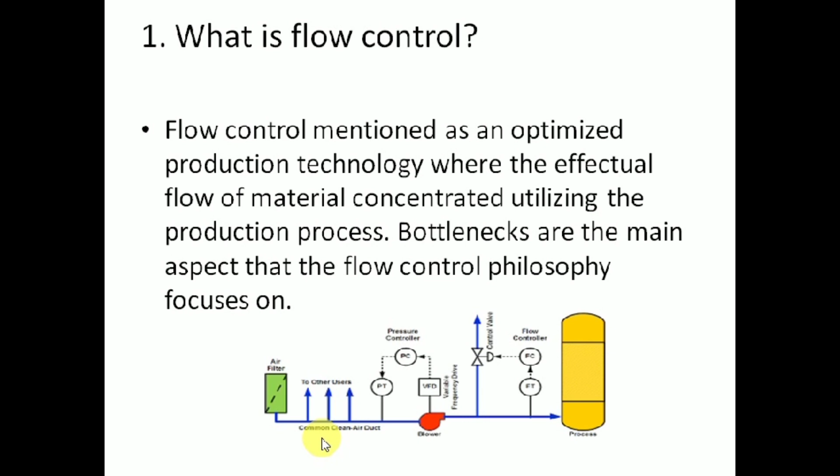So second question, mention the difference between unit operation and unit process. I briefly described the difference between unit operation and unit process in the last lecture, lecture number 2. I also share the link in the description so you can understand from that video. But I describe it in a simple way.

Unit processes are chemical transformations or conversions. Basically a unit process is called a chemical conversion that is performed in a process. For example, dehydrogenation, smelting, reduction, electrolysis. Electrolysis is a process which can produce hydrogen, so you call it electrolysis of water. What is a unit operation?

Unit operations are physical treatment steps in a chemical process which are required to put raw material in a form in which it can be reacted chemically, and to put the product in a form which is suitable for the market. Basically, unit operations are called physical operations.

So basically, in unit operations changes take place in mass and concentration where energy is provided from an external source without any chemical change. For example, mixing, evaporation. Evaporation basically enhances the concentration of solute. So these are the deep concepts of unit process and unit operation. This is a very important question for industrial interviews.

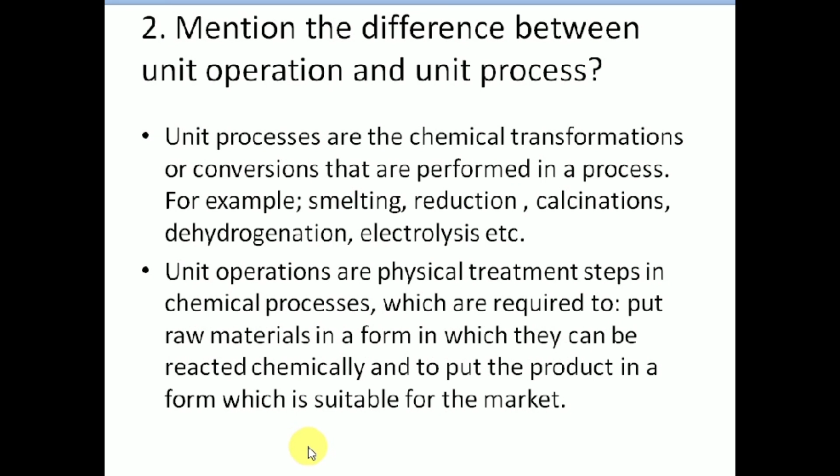So the third question is a very important question. What is a solvent? A solvent can be defined as a liquid that can suspend, dissolve or take out other chemicals, where they do not perform any chemical change to the material or solvent. The main process of a solvent is to clean, apply, process or separate materials.

So what is the purpose of the solvent? To extract the required solute. Feed consists of solute and carrier liquid. What is the purpose of the extraction process? To separate solute from feed with the help of solvent. Solvent does not chemically react with the feed, but it is useful to separate solute from feed. The actual product is the extract.

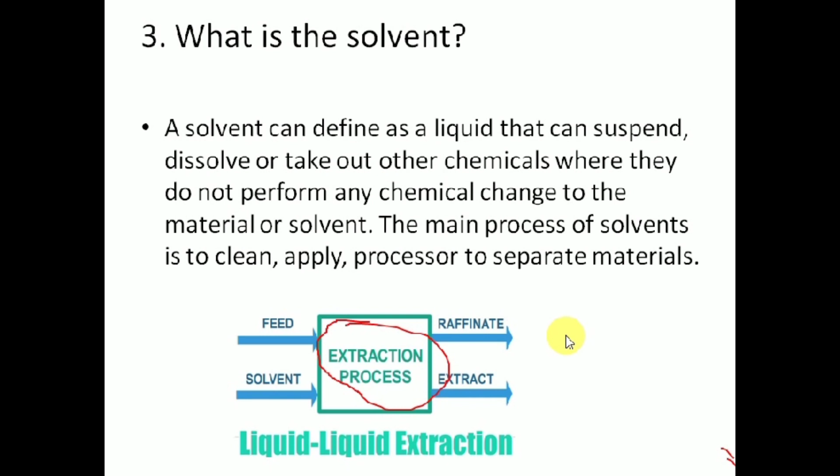The fourth question is very important. What is material requirement planning? When the number of finished goods is provided, it requires an appropriate quantity of raw materials and related components to make them. A computerized tool that is used to handle material orders to supply at a later date is called a material requirement planning system.

So basically, what is the purpose of material requirement planning? A computerized tool that is used to handle material orders to supply at a later date is called a material requirement planning system.

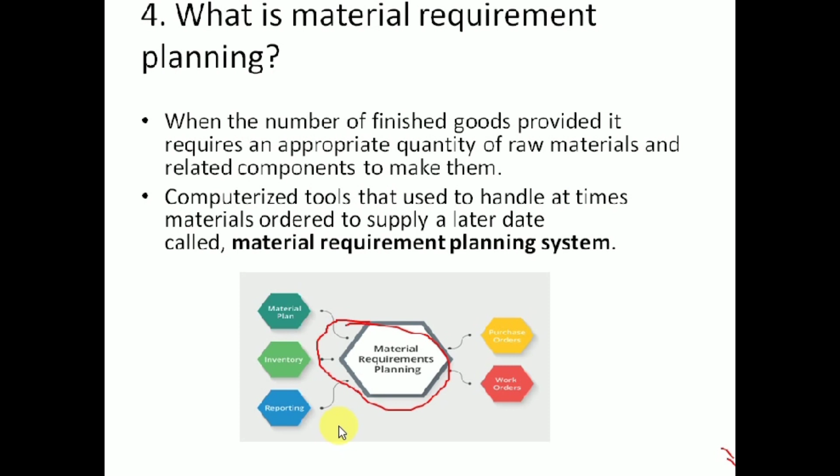Question 5 is very important. What are PCBs? The abbreviation for PCBs is polychlorinated biphenyls, and it is mainly utilized for disposal issues, usually in the chemical industry.

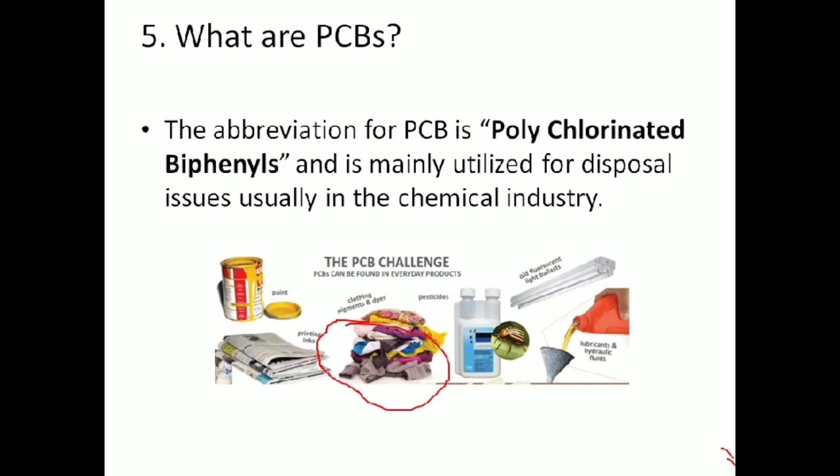So sixth question: what are the design considerations for a piping system to transfer slurries? The point to consider when designing a pipe to transfer slurries is that the pipe should have the capability to self-drain. In the case where self-drain is not possible, manual draining facility should be installed. Also, when plugging opportunities are high, blowout or rodout connections must be provided to clear the lines.

Clean out connections must be installed on both sides of the valves for proper flushing. Access flanges must make use of T connections. Flange connections must be provided to all manifolds for easy usage.

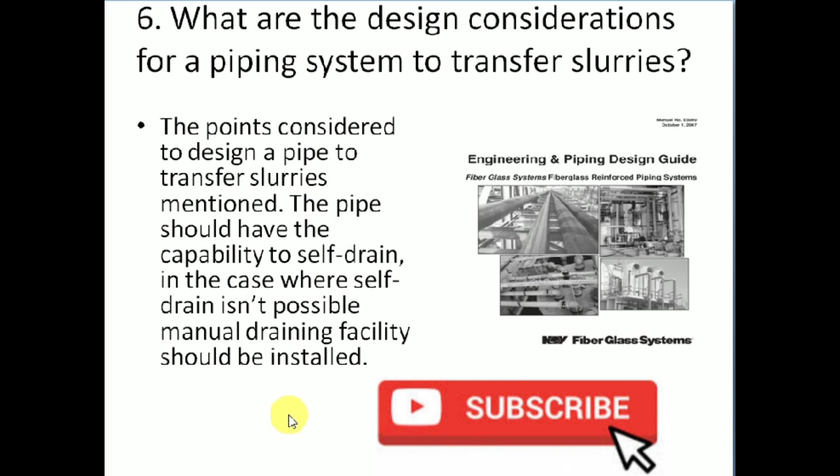When the interviewer asks about the third law of thermodynamics: according to this law, we can make the entropy of any system zero, but that system should be a crystalline solid and the temperature should be absolute zero, meaning minus 273 degrees Celsius. At absolute zero, the entropy of any system will be zero.

According to the third law of thermodynamics, when a system reaches absolute zero, a minimum value is reached by the entropy of the system. For the universe to attain absolute zero is very difficult; it is not possible to freeze the molecules of any substance, even a perfect crystalline solid. A perfect crystalline solid at absolute zero will have zero entropy.

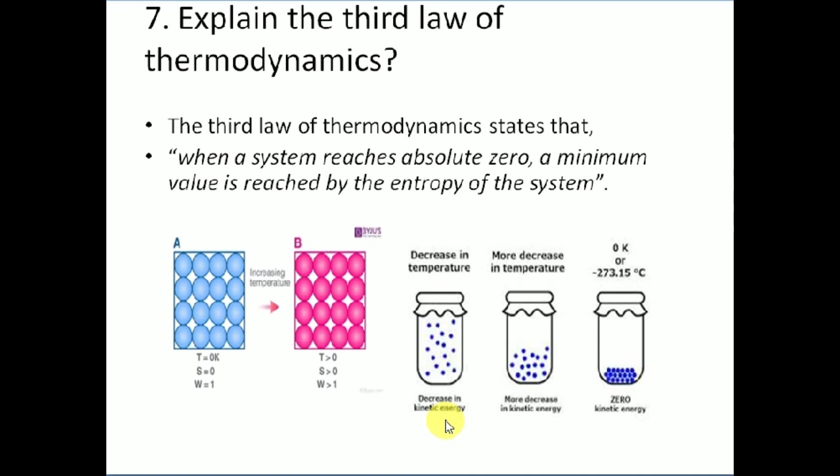Question number 8 is very important. What is Just In Time, also called JIT? JIT is a system of inventory management with an approach to have zero inventories in stores. Inventories mean any materials, any raw materials. According to this approach, material should only be purchased when it is actually required for production.

JIT is based on two principles: produce goods only when it is required, and the products should be delivered to customers only at the time when they want them.

Product management philosophy developed across continuous reduction of waste, called lean manufacturing. Wasted man hours, reduction of inbound inventory by formulation of supplier delivery schedules, minimization of outbound stock, and more are few techniques that exist in JIT. In this way, cash flow is enhanced and sales margin is maximized.

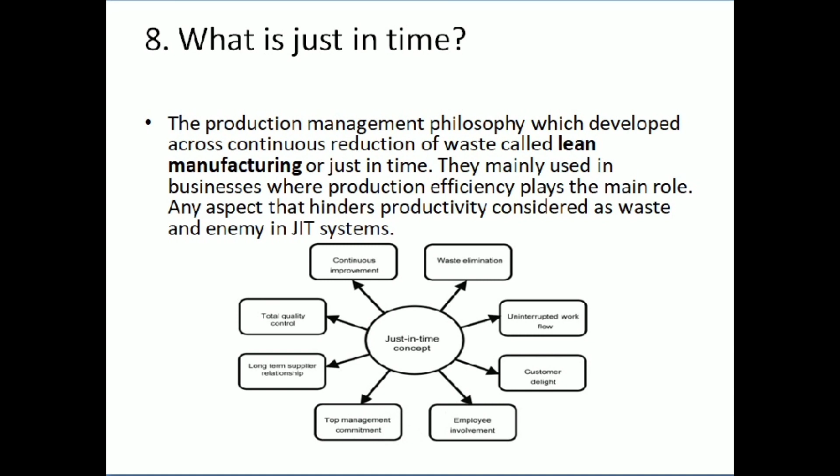So next question, when interviewer asks what is quicklime and what are its uses? Quicklime is calcium oxide, CaO, commonly known as quicklime or burnt lime, a widely used chemical compound. It is a white caustic alkaline crystalline solid at room temperature.

So how is quicklime formed? When limestone and chalk, calcium carbonate, are burned in the kiln, it turns into quicklime, calcium oxide, and releases carbon dioxide. Water can be added to burnt lime or quicklime to produce hydrated lime, calcium hydroxide. So quicklime is in a dehydrated stage and is an effective scavenger. When compared with other scavengers such as silica, it is cheap. It is usually found in water sensitive paint formulations.

Quicklime uses include making mortar, manufacturing glass, and treating wastewater. Quicklime has a wide range of uses, including in the production of iron and steel, paper and pulp production, treatment of water and flue gases, and in the mining industry. For the iron and steel industry, we also supply different fractions of both reactive shaft furnace, burnt and hard burnt rotary kiln lime.

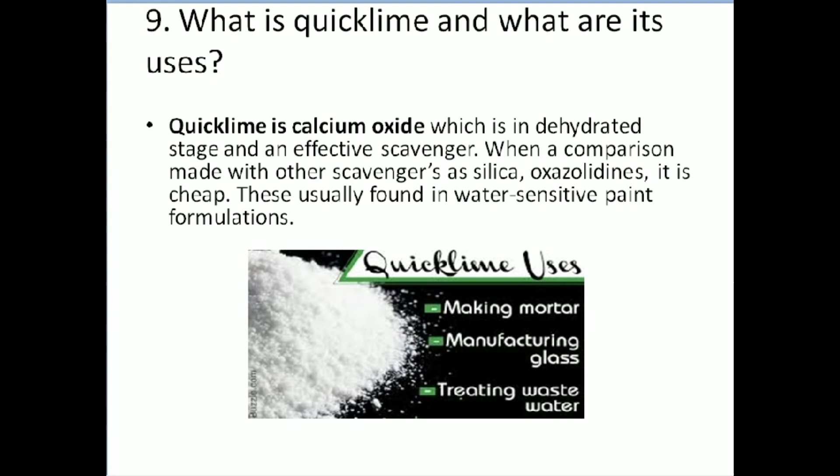Next question, when interviewer asks about what is the angle of repose and its importance in the chemical industry? Angle of repose is a property of particulate solids. You see in these diagrams, a conical pile is formed when a bulk solid is poured onto a flat surface. The angle formed between the pile edge and the flat surface is known as the angle of repose.

Angle of repose, between the pile edge and the flat surface, is known as angle of repose. Angle of repose depends on the below factors: number 1, surface area; number 2, density of the material; number 3, coefficient of friction of the material. A material having a low angle of repose will always create flatter piles as compared to materials with a high angle of repose. This is used in designing equipment for particulate solids. Additionally, this angle can be used to calculate the size of the conveyor belt used to transfer the material.

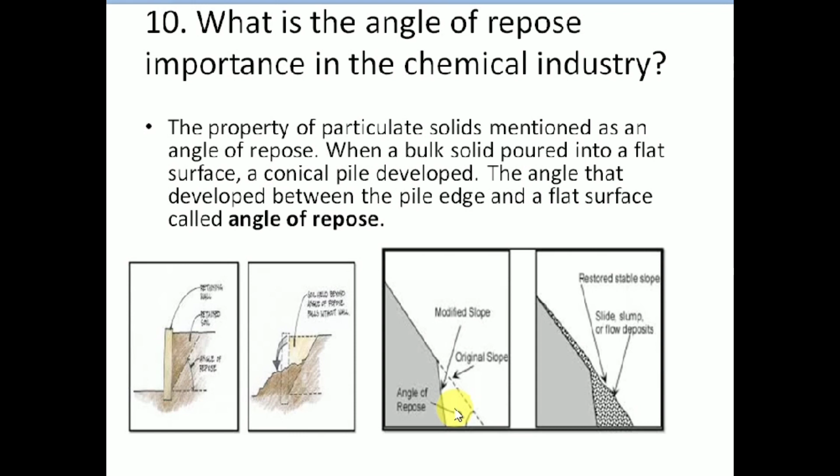So next question is, what are the three classes of organic solvents? Organic solvents are usually classified as hydrocarbon, oxygenated and halogenated solvents. They also take into account ketones, alcohol, esters, and glycol ether esters. When hydrocarbon solvents are considered, they include aromatics and aliphatics. Chlorinated ones usually fall under halogenated solvent.

So basically, organic solvents are classified by their chemical structure into three main types. One is hydrocarbon solvents, which you already learned in your previous classes, aliphatic and aromatic. What is aliphatic and what is aromatic? Oxygenated solvents include alcohols, ketones, aldehydes, glycol, and halogenated solvents include chlorinated and brominated hydrocarbons. These are concepts of unit processes you already discussed in your previous classes, elementary or higher secondary schools.

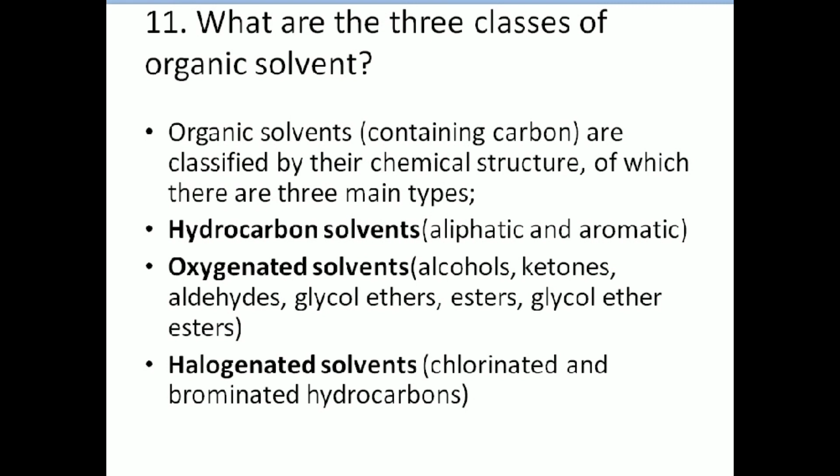So question number 12, when the interviewer asks what do you understand by wet bulb globe temperature: WBGT is a type of apparent temperature used to estimate the effect of temperature, humidity, wind speed, wind chill, and visible and infrared radiation, usually sunlight. So wet bulb temperature is used to estimate the effect of temperatures on environment, on humans.

It is used by industrial hygienists, athletes, sporting events, and the military to determine appropriate exposure levels to high temperature. You can easily understand with this figure. One of the ways a student can measure the effect of temperature and humidity is through this equipment, wet bulb globe temperature.

It was in the 1950s that the wet bulb globe temperature was developed, and now it is agreed as an international standard. Their temperature readings take into consideration ordinary dry bulb temperature, wet bulb temperature, and black bulb globe temperature.

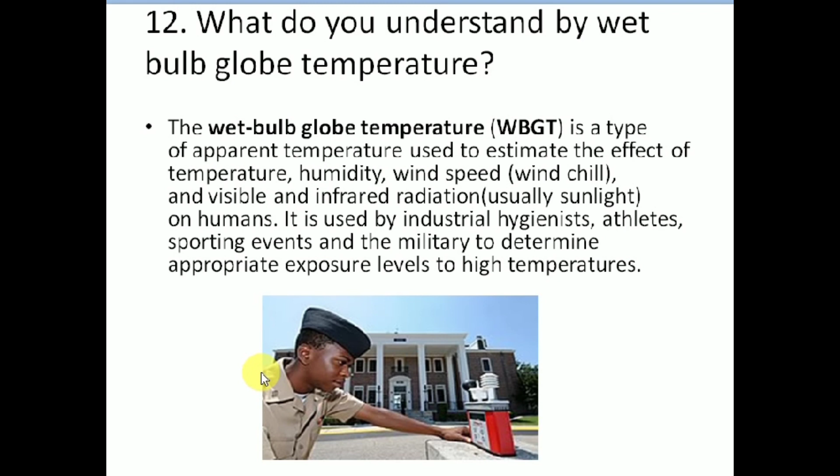So this question is very important: what is Gibbs free energy? It mentions the maximum amount of mechanical work or available energy done by a system under stable temperature and pressure. So Gibbs free energy is the maximum amount of energy available to do useful work.

So delta G is equal to delta H minus T delta S. Delta H means useful energy, and T delta S means energy loss due to disorder, meaning entropy. So if useful energy is greater than energy loss due to disorder, the reaction is spontaneous. Gibbs free energy also gives information about whether a reaction is spontaneous or non-spontaneous. Spontaneous case is when useful energy is greater than energy loss due to disorder. When useful energy is less than energy loss due to disorder, the reaction is non-spontaneous.

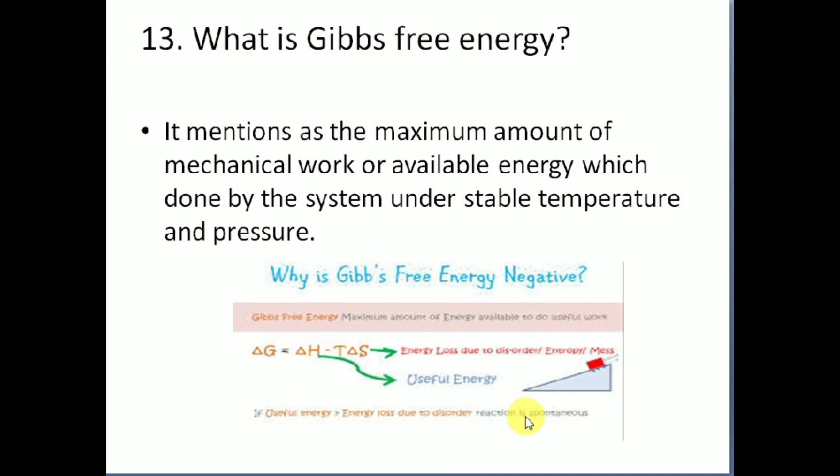So the next question is: what happens when the paint dries? A very important and easy concept. In the manufacturing process of paints, solvent is added to them so that thinner paints are prepared. This solvent is used to apply them to different surfaces. After the application of the paint, the solvent evaporates and the pigments and resins make the paint form a solid and thin coating on the surface.

Meaning to say, this is like the behavior of liquid extraction. The solvent plays an important role in the application of paint, and pigments and resin make the paint form a solid and thin coating on the surface, and the solvent evaporates.

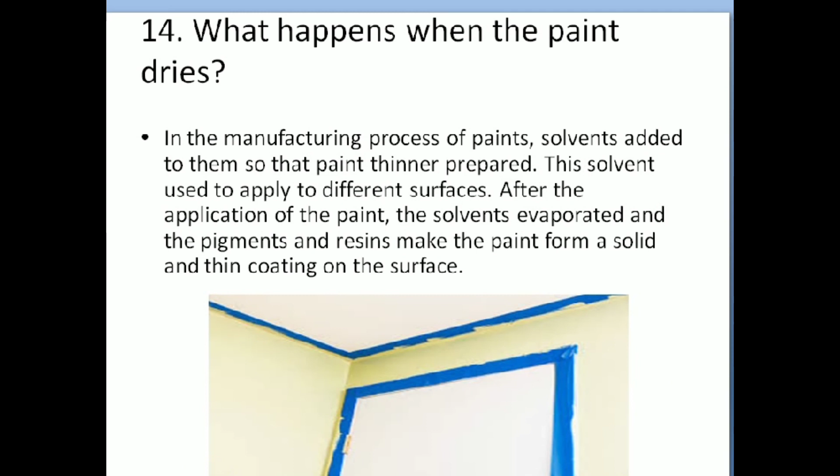So basically, food additives; to avoid foaming, styrene systems are added with inhibitors to avoid polymerization. A fuel additive: the detergent mixed with gasoline and motor oil so that the engine keeps clean. An example of food additives: substances we add to food to make them taste better, last longer and look nicer. So this is the application of additives in food. Natural, nature-identical, artificial. You can easily read this in that video.

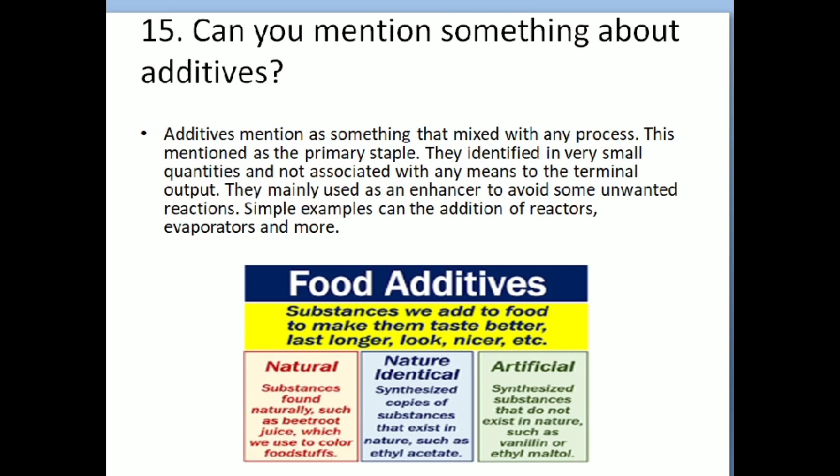The structure is formulated in a manner that the largest mesh size resides on the top and the smallest at the bottom, and the weight before beginning and other values are noted. With all this set up, the topmost cylinder is where the solid is placed. Now, without disturbing the setup, it is exposed to vertical and horizontal movement. The solid is made to pass through varied mesh sizes where particles are separated according to their size, to determine the size of the particles and the distribution. Advanced methodologies such as laser diffraction and video imaging can be utilized.

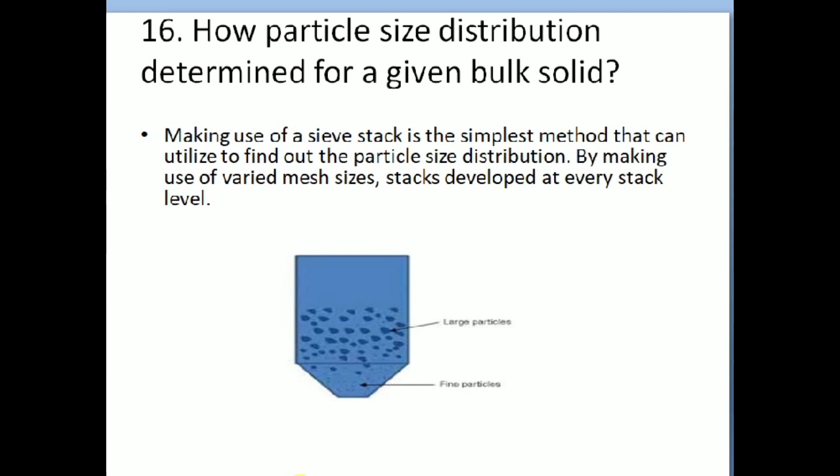So the next question is: what is an isochoric process? An isochoric process is a thermodynamic process taking place at constant volume. What is thermodynamic? Thermodynamic means heat in motion. When we provide heat in a cylinder... iso means same, equal, constant. Choric means space, volume. So isochoric is also called an isovolumetric process. So what is the concept behind the isochoric process?

This is the cylinder. When we apply the heat through candle, through burner, the volume is not changed, but we provide heat, then intermolecular forces and internal energy increase, and molecules pressurize, and pressure and internal energy also increase, but volume does not increase, volume is fixed. So this process is called isochoric process.

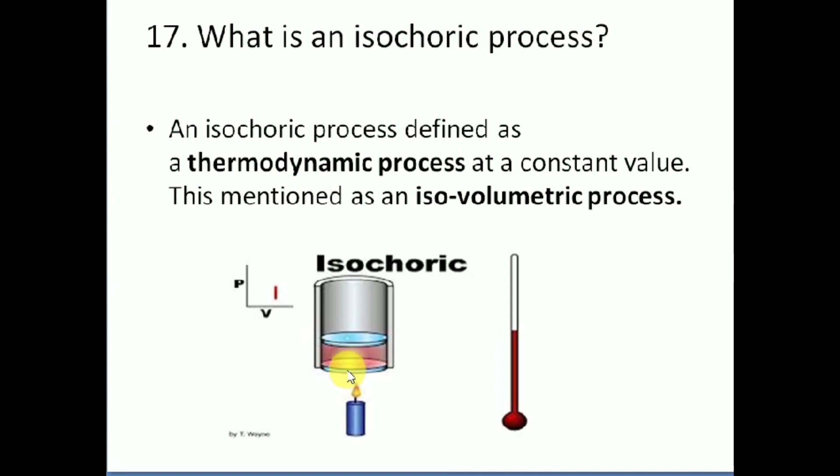Nitrogen oxide reduction, carbon monoxide oxidation and uncombusted hydrocarbon oxidation. So this is called oxidation and reduction process. So we enter the CO and NOx in the chamber. So what is the reaction held in this chamber? Two reactions are held. One is oxidation and second is reduction. So this is also called oxidation and reduction process.

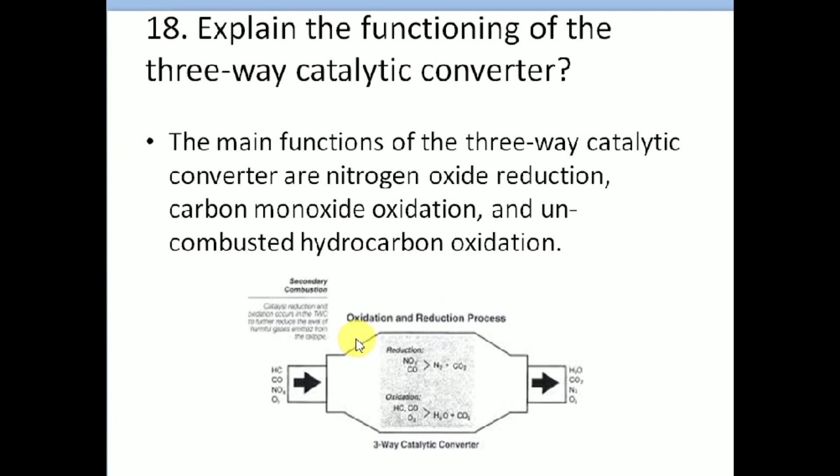So next, our question 19: what are the disadvantages and advantages of PFR? What is PFR? PFR is plug flow reactor. In the PFR, the flow of fluid through the reactor is orderly with no element of fluid overtaking or mixing with any other element ahead or behind. Actually, there may be lateral mixing of fluids in a plug flow reactor. So what is a plug flow reactor? From the figure you can easily understand.

The advantages of PFR are high conversion rate, continuous process and operating at less cost. The disadvantages of PFR are high maintenance cost and temperature gradient, because the elements are not mixing with any other element ahead or behind. Actually there may be lateral mixing of fluids in a plug flow. This is the concept behind the PFR.

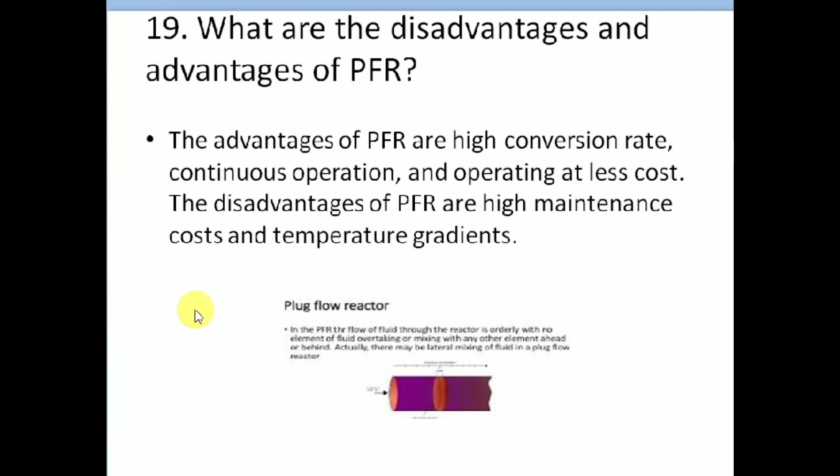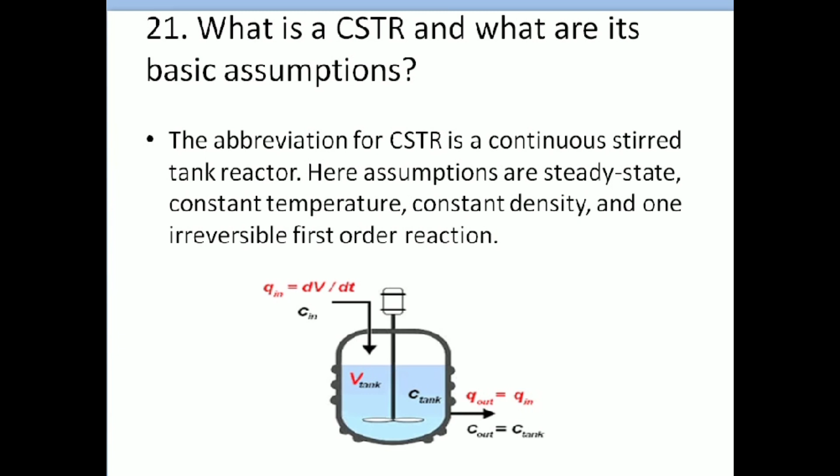So next question is very important. What is meant by global warming in the engineer's perspective and the common man's? From a common man's perspective, global warming is the rise in the world temperature. The average temperature enhancement at the surface of the earth is mentioned as global warming by an engineer's view. This is because of the enhanced effect of greenhouse gases. The greenhouse gases are ones that capture heat emitted by the globe into the atmosphere, which leads to temperature rise.

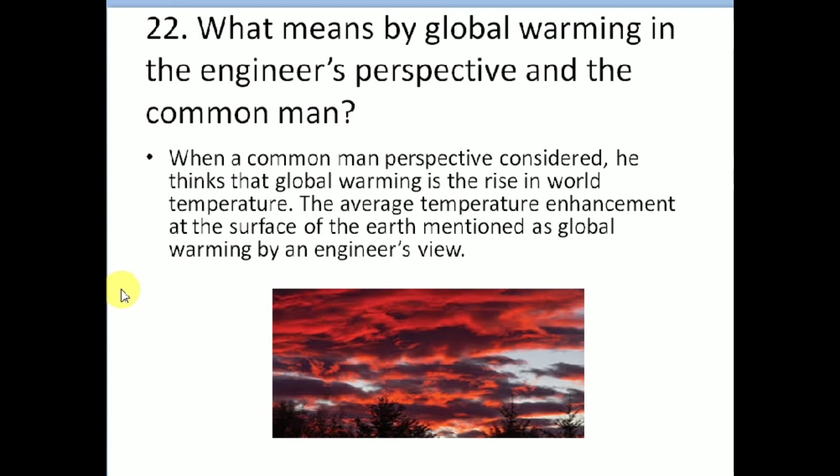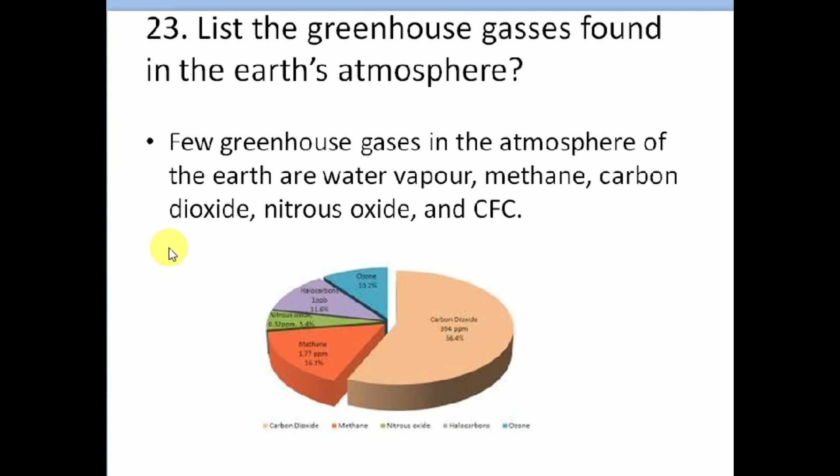Carbon dioxide CO2, nitrous oxide, and CFC. So very important is carbon dioxide CO2 at 56.4%, methane 16.3%, ozone 10.2%. So these are the greenhouse gases found in the earth's atmosphere. So next question is, what is carbon sequestration?

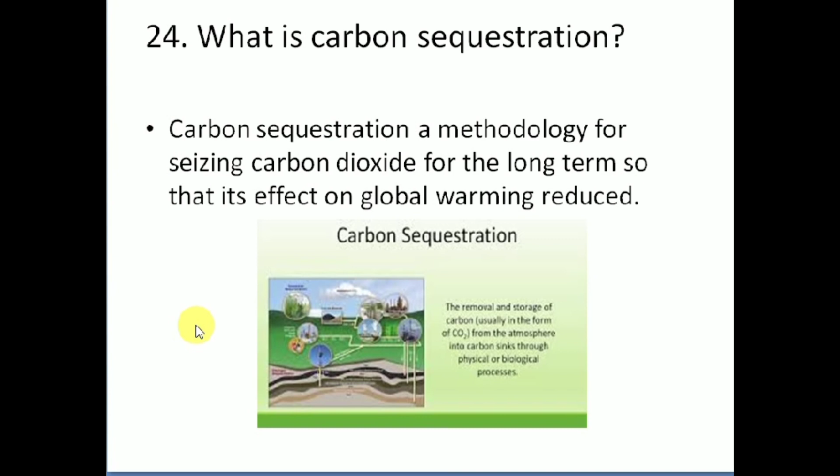What is carbon sequestration? Carbon sequestration is a methodology for storing carbon dioxide for the long term so that its effects on global warming are reduced. So what is the purpose of carbon sequestration? So that its effect on global warming is reduced. So the removal and storage of carbon, usually in the form of CO2, from the atmosphere into carbon sinks through physical or biological processes is called carbon sequestration.

So the next question is very important. Define the octane number. Octane number is important in the petrochemical industry. So how do we enhance the octane number of petrol? By hydrodesulfurization, so removal of sulfur. An octane number is defined as the resistance to explosion of fuel, especially in spark ignition engines, when compared with an isooctane and heptane mixture.

So what affects the octane number? Octane number decreases with an increase in the carbon chain length. Normal paraffins have low octane numbers and these become lower as the molecular weight increases. So octane number increases with carbon chain branching. Isoparaffins have higher octane numbers than the corresponding normal paraffins. When we decrease the carbon chain, we increase the octane number. Higher octane number means good fuel.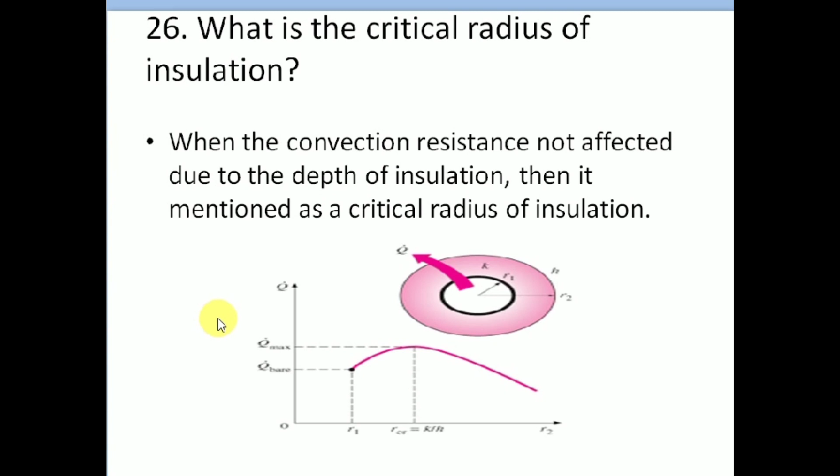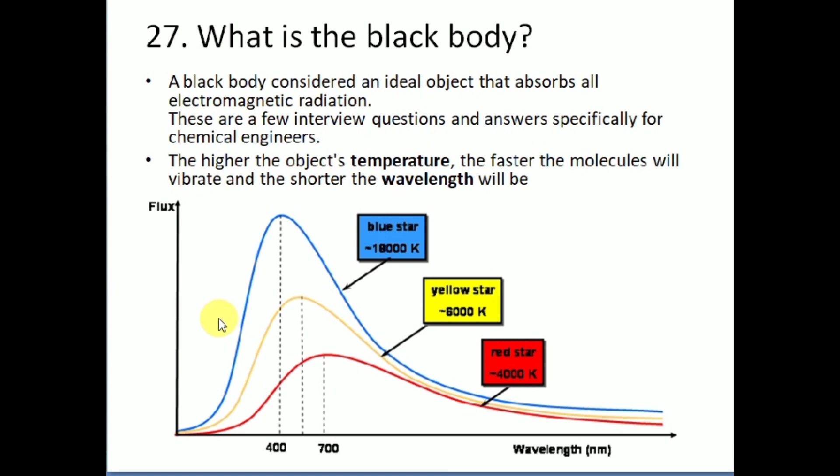So the next question is, what is a black body? A black body is considered an ideal object that absorbs all electromagnetic radiation. These are a few interview questions and answers especially for chemical engineers. The higher the object's temperature, the faster the molecules will vibrate and the shorter the wavelength will be. So it's a very important concept. So the black body indicates the wavelength and temperature relation. What is a black body? A black body is an ideal object that absorbs or emits all electromagnetic radiation. This is a very important concept.

So graduates who are about to attend a chemical engineering interview can run through these questions and answers and will benefit.

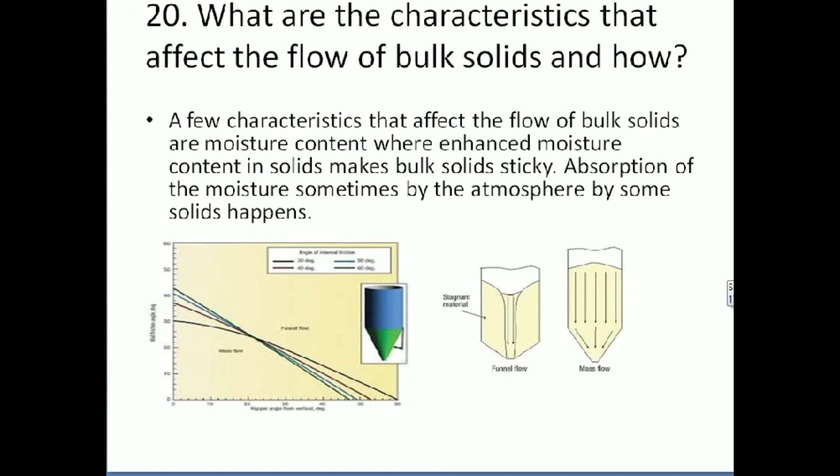I am very happy to deliver this lecture because conceptual chemical engineering is the first purpose of our educational institute. So this video consists of common interview questions and answers for chemical engineers. So hopefully you enjoyed this video.